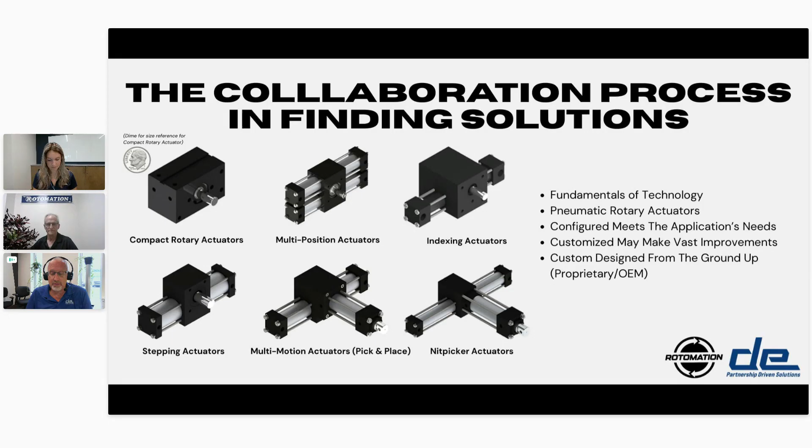Everything you've mentioned is rack and pinion based, and I think this is a good opportunity to go to the next slide and talk about that. There are some different technologies, and in the upper left view is a rack and pinion - what are some of the details we're really looking into there? I think we've talked about it's all about the gear, how the gear is cut, and the rack is cut to mesh with it.

That's right, rack and pinion actuators. Actually, this one has the pistons incorporated with the rack. Ours are floating, which is a more robust solution, but they're very configurable. The end caps can be different from one side to the other, so you can have all kinds of different options. They're very rugged. You can have any sort of rotation you want just by changing the length of the cylinders in the rack. So it's very, very configurable.

Now, as Jim mentioned, the gear is the focal point of a rack and pinion actuator. Back in the day when we first started, we were buying commercial gears and attaching them to a piece of shaft using keys and pins. And that was the biggest failure point that we had.

So quite a number of years ago, we went to one-piece pinion shafts that we turn out of a solid chunk of heat-treated 4150 steel. It's not the strongest steel in the world, it's not the hardest, but it's probably about the toughest, which means that when you get to the end of the stroke on a rotary actuator, and you've got a big load spinning around with a lot of inertia, all of that kinetic energy ends up going into the gear tooth.

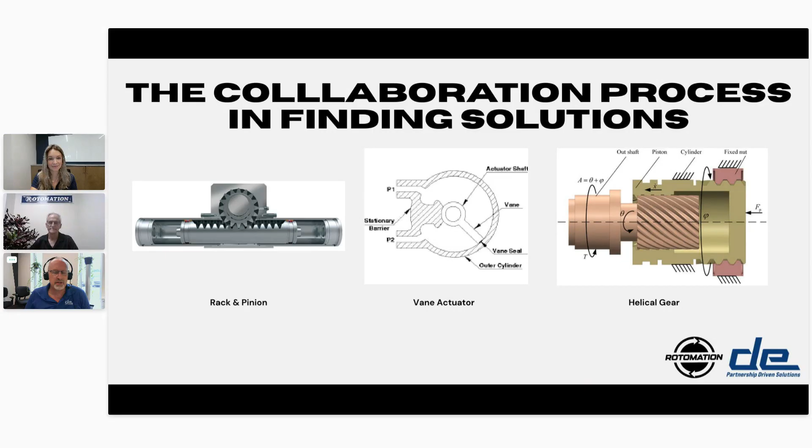When we get into this, I think the whole point is identifying how customs come to be. We've got lots of options here available, but inertia we talked about as being the custom driver potentially, and shaft ends being the custom driver potentially.

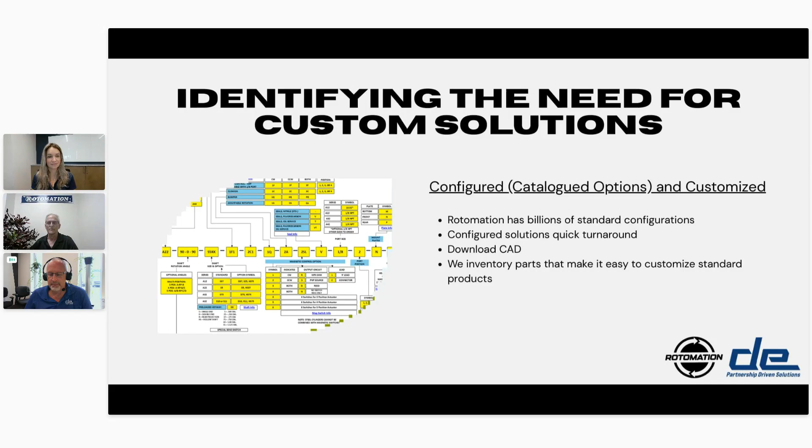Next we've got some examples, and I'd like to show a couple of those and go into what we've done and developed along the way. This was a Donald Engineering solution that happened many, many years ago. This is one of our first early specials that we collaborated on together. I have to admit, Norman, this was before my time. Can you tell us a little bit more about this one?

Yes, I can tell you. In fact, it was early in my career here also. I actually developed this A032, which is very small, but it's like 10 pounds in a 5-pound box type of thing. It's got big, heavy bearings and dual racks.

So it's really tiny, but your customer was doing some kind of spraying booth, and you needed a pretty rugged shaft, because the spray nozzle would produce a reaction force, and he had to have the actuator outside of the spray booth. So we came up with our little A032, but put some big honking bearings on the outside to support a 1/2-inch diameter shaft instead of our normal 3/8. It's got a long shaft with a long keyway, so they can adjust the position of their spray nozzle. I think it was actually vertical at the time, but I don't remember precisely.

So with a few extra parts, we made these bearing adapters and put in some bigger bearings. Actually, they're off-the-shelf bearings for us for another actuator, and then a special shaft. And there we have it. I think they made quite a few of these over the years, but then moved on to something else, I don't know what. The fact that you still have one and have access to it, I think that's pretty cool too. That also shows backwards compatibility and long-term support.

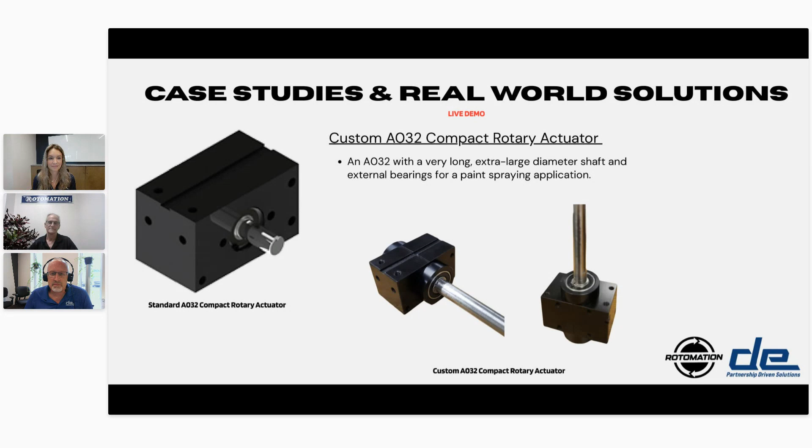That is good, cool. The next application was one that you and I developed, Norman. This was an application where the actuator laid on its back and was rod up, and the rod was extended long, and on the end of the rod was a disc, kind of like a frisbee or a plate. In that plate there was a series of holes around the perimeter. I don't have a good picture of that end application, but if you kind of think of a clock, and every place where the number would be, there was a round hole.

So this is laying on its back, shaft up, and this plate is actually a ceramic disc, inside a high temperature oven. Our actuator is outside of the oven, but our workpiece is inside the oven. As this indexed around step by step, what we were doing is presenting a small crucible and setting it underneath the dispensing head. We would dispense into the crucible, and then advance.

The next one would dispense, but alongside where we had just dispensed into, a cylinder came up from the bottom with a load cell on it, and we would measure the weight of what was dispensed to make sure we had an accurate dispensing. And this was the thing that had to index the right amount.

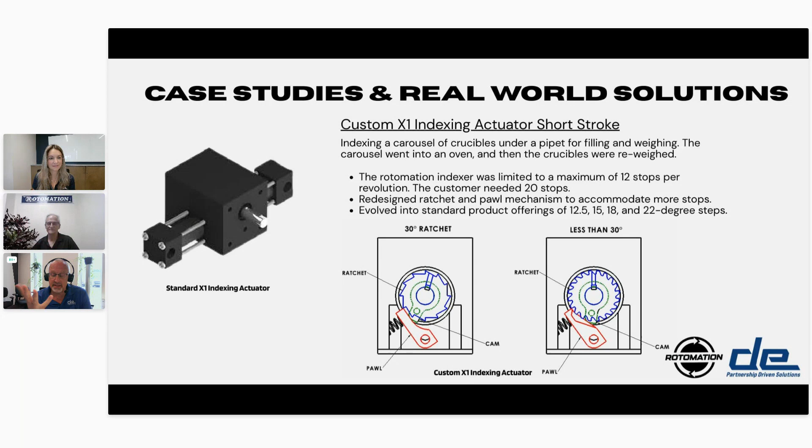This one's fascinating, Norman. This was one of yours. Tell us a little bit more about this. Yeah, sure.

Customer came to us. This customer builds air conveyors for plastic bottles. These are things like water bottles, soda pop bottles, where they come out of a blow molder and they have to move across the plant somewhere to be filled and labeled. Very high speed, of course. These things are going by hundreds a minute.

This company had developed a special feature to their air conveyor, and that is that they put dampers every 8 feet or so in the duct, and they would have a high pressure blower that would pressurize this duct, and being able to close sections of the duct as it filled. It was actually like a buffer. So they would fill up one section, close the duct, fill up the next section, close the duct, and it would flow. Sometimes you'd have a lot of them closed, sometimes only one or even none, and the things are just flowing through. And that has to do with the difference in speed between the blow molding and the filling operations.

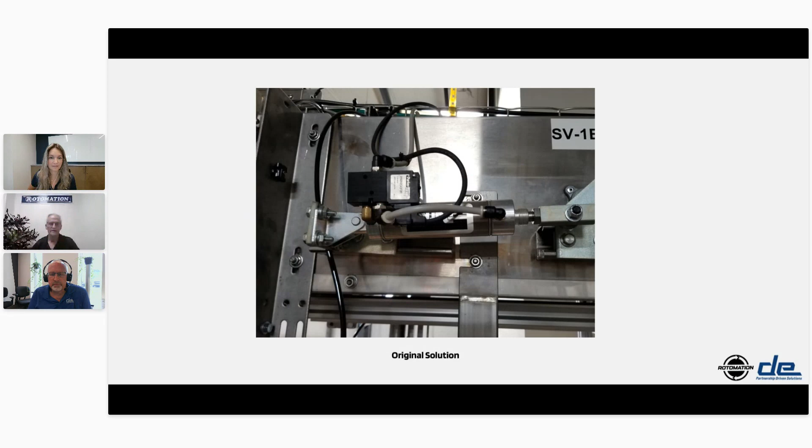Now, unfortunately, it looks like it's got a little cut off in this picture, but there is a... maybe go back one, please. Can you do the back one more, the original one? Yeah, I guess you can't really see.

In any case, this cylinder would rotate a crank to turn the damper. The damper was on a square shaft that came poking through the side of the duct. It had a little pillow block bearing there. And so as the cylinder extended, it would run into an angle bracket because they had to be able to adjust how far it opened.

And that angle bracket had slotted holes in it. And then when the thing retracted, it also had to be adjustable. So they'd had a bracket on the other end that they could move the entire rear end of the cylinder to adjust. And then they had a valve on there, and I guess that's about it.

So all these parts were separate. They were bolted onto the side of the duct. I actually witnessed a guy putting it together. It took him an hour and a half or so to put this thing together, and then he's got to adjust it.

So he's tightening and loosening these bolts and sliding the little brackets back and forth. Very slow, time-consuming process. And the other thing that resulted from that is when that cylinder sticks out and runs into that bracket, you've got a pinch point.

So in some applications where this thing was accessible to workers, they had to put this big steel cover over it, which just added more to the cost and made it more work to maintain.

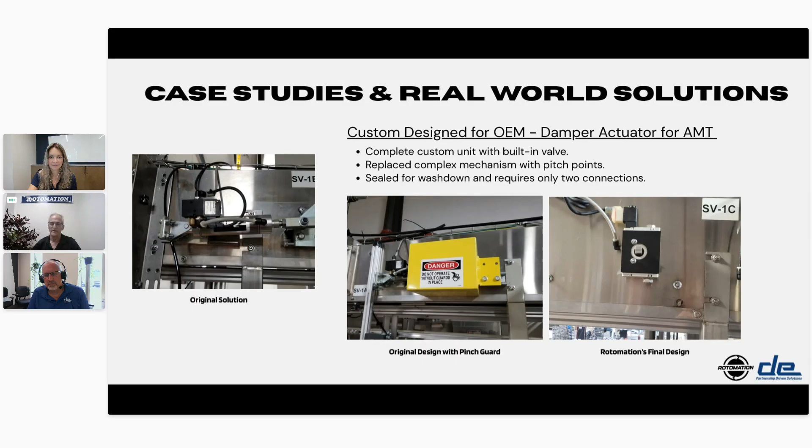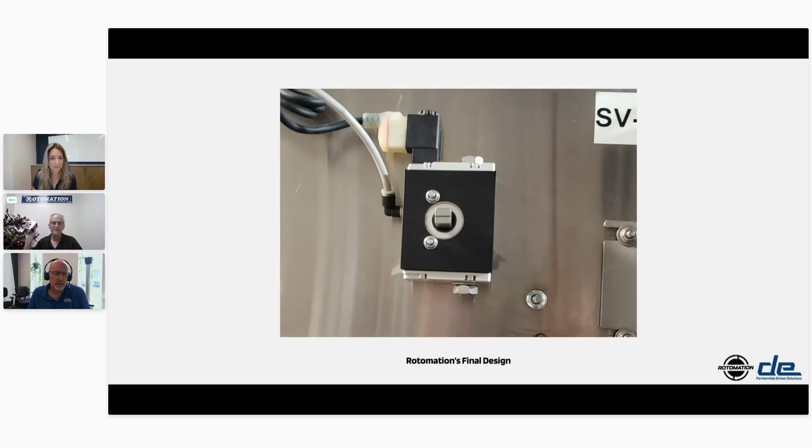So they came to us, and we came up with this actuator. It took a couple iterations actually, but it's an all-in-one solution. You could go to the third slide there and show a little close-up. This thing has the valve built in.

There is a little pilot valve here. It drives a spool that's built into the actuator. It has fixed orifices for the exhaust, so they don't have to adjust the speed. The other one had adjustable flow control valves. Somebody had to adjust it, and sometimes somebody messed around with it and screwed things up. This is all fixed in place. You can't adjust it.

It has two holes. They slide onto the studs on the duct. It has a square hole in the shaft, which supports the shaft, so they don't need that bearing on the side of the duct anymore.

I'm going to turn it right side up. It can go either way because sometimes they want the thing on one side of the duct and sometimes on the other side. So we had made up these labels so the operator didn't have to turn around in his mind. He can just look at the instructions on the label.

Adjusting the rotation is very simple. You have this rotation adjuster with a jam nut right here. You can adjust it under pressure, see the duct go to exactly where it wants to go, and then tighten it up. Very simple. It's also sealed for washdown.

They didn't do a lot of washdown, but they did occasionally, and the old system didn't stand up to that real well. So this is very nice.

Oh, they also—all you have to do is have one air hose, and this line that we had custom made with exactly the M12 connector they wanted, lit for indication with manual overrides for setup. The whole thing just drops right on. It takes them a few minutes to install it and then adjust it, and then it lasts.

Perfect. Thank you, Norman. I think we've got one more real example. Yeah, and I should have stepped back—these two examples are things where we've gone beyond the customization.

So the AO32 with the long shaft, we call that customized. It's 90% standard body, racks, bearings, seals, all that stuff. We put in an extra long shaft and outboard bearings. So we do a lot of that customization where we change a few parts.

But in these examples, we went way beyond that. We built something, designed it from the ground up to solve a very specific problem. So here's the next one.

This customer is filling bottles of toilet bowl cleaner. You may be familiar with that—it's a household item. It's got this little twisted nozzle or spout on top that allows you to put the stuff under the toilet bowl, which is great, but it's really hard to fill.

Filling equipment likes to go up and down. So they built this big machine that would have these gripper rotators to grab the bottle, rotate it 45 degrees to present it to the filling, rotate it back, and then it goes on to another station where we do the same thing.